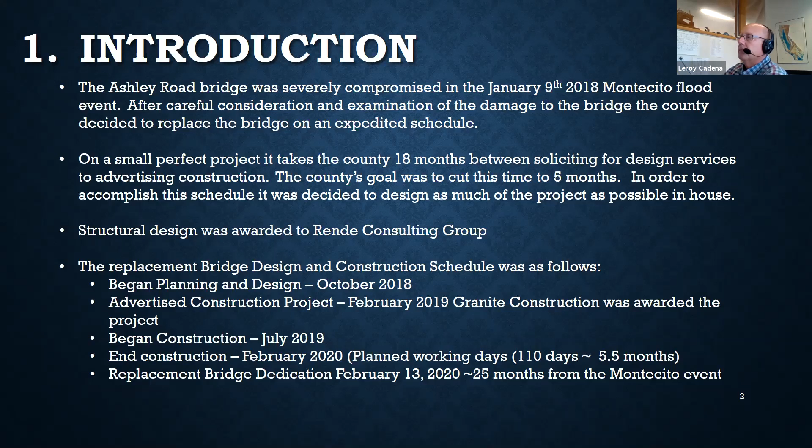The project included the following tasks: removing debris, done by our construction team; reshaping the channel, also done by construction, overseen by them; design, selection, and installation of a temporary bridge, also overseen by our construction team; and design of the replacement bridge was, of course, the design team, and construction of the replacement bridge was actually done by our construction team.

I don't know why I said design. But the dedication was handled by our administration team. I'm just trying to say this took a group effort from a lot of different divisions in public works to accomplish this task.

So a brief history about the bridge. The Montecito Bridge, or the Ashley Road Bridge as we call it, was constructed in 1918 over Ashley Road, over Montecito Creek. The bridge consists of a single span cut stone masonry arch, and it was built on cut stone masonry abutments and founded on larger cut stone masonry spread footings.

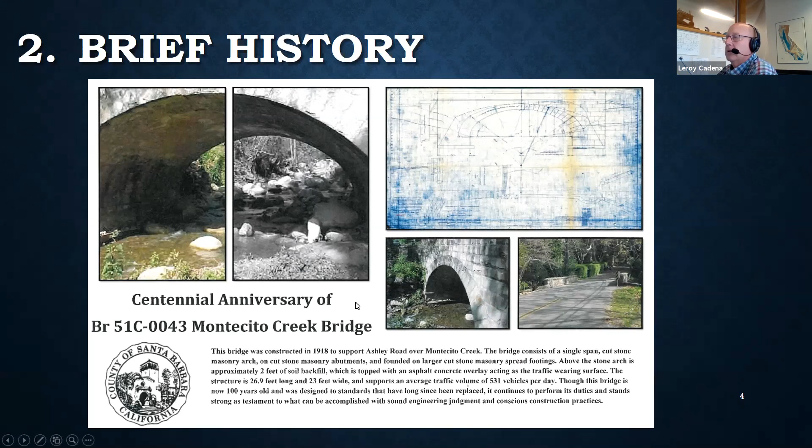Now I'm going to prepare you because we're going to show you a video. We originally took this video as part of work prior to the storm event, when we were working on scour countermeasures for this bridge. Part of this video was taken before the storm event, probably just a few weeks before, and then it transitions into post-event footage.

This footage was taken by our admin team. And there we see the dramatic effect of the storm event.

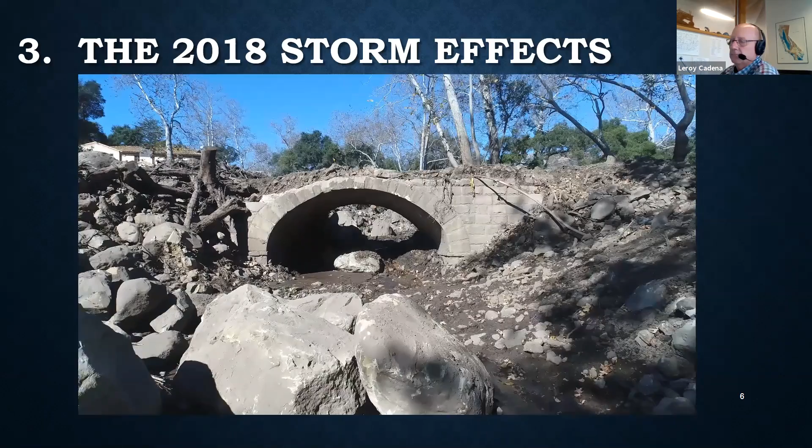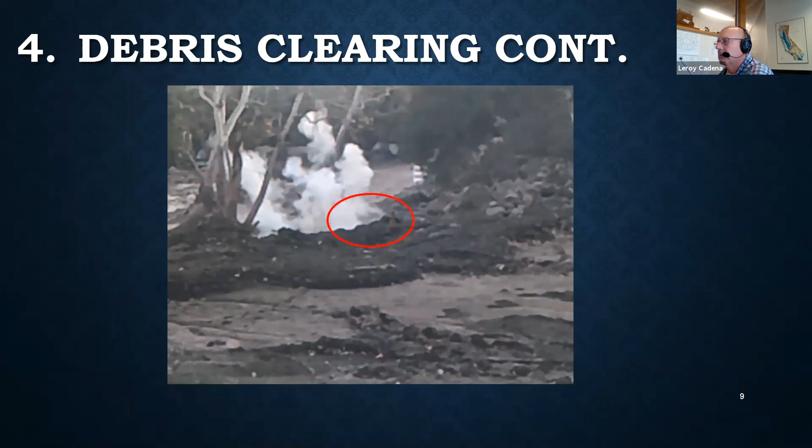Now this is a video of the actual demolition, and what was left was this. It worked very well, but it took the team coming up with several ideas to try to remove these large rocks and debris out of the way.

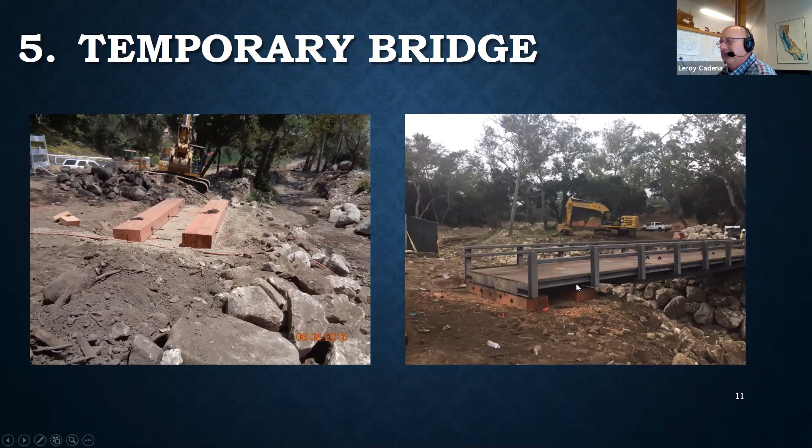Once that was accomplished, we installed a temporary bridge for emergency access and pedestrian use. That bridge was founded on a spread footing. Here we have two timbers on each side of the footing compressed together with ties, and concrete was poured in between. On the right, you can see the bridge being placed directly on the footings. Here's the cast, the forms prior to pouring the concrete, and here's the final product. So it did its job.

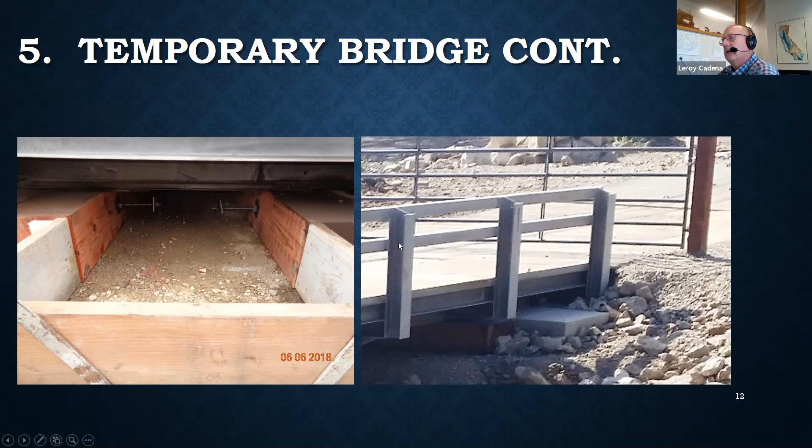It lasted for our duration. I don't think there was any emergency use, but the fire department did drive over it a couple of times just to make sure they could access it. Here's a finished picture of the temporary bridge.

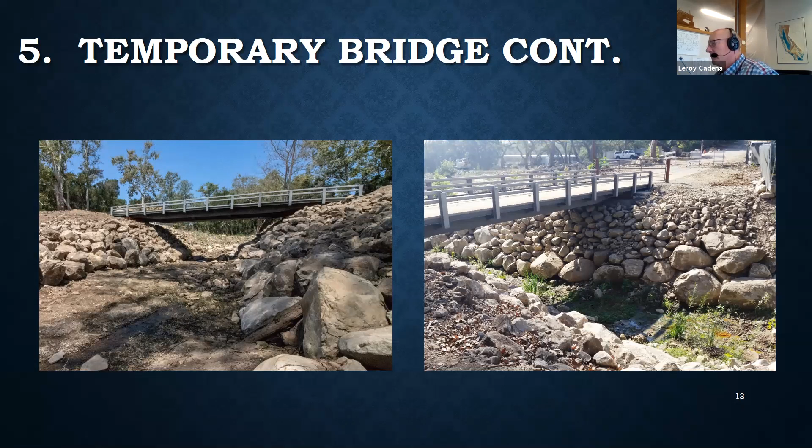Also, because it was a temporary bridge done under emergency work, we took the opportunity to shape the channel under that emergency work for what was going to be the final shape of the channel for the permanent bridge. You can see this rock is all lined, shown in both pictures here. We tried to take advantage of that so that during construction of the permanent bridge, we wouldn't have to access the creek again.

Here's a couple pictures of some temporary utilities that had to be replaced. We had a water line, and this was a temporary realignment for the construction of the temporary bridge. The water line gets reconnected here on the side of the bridge, and underneath the bridge is a sewer force main that was attached as well.

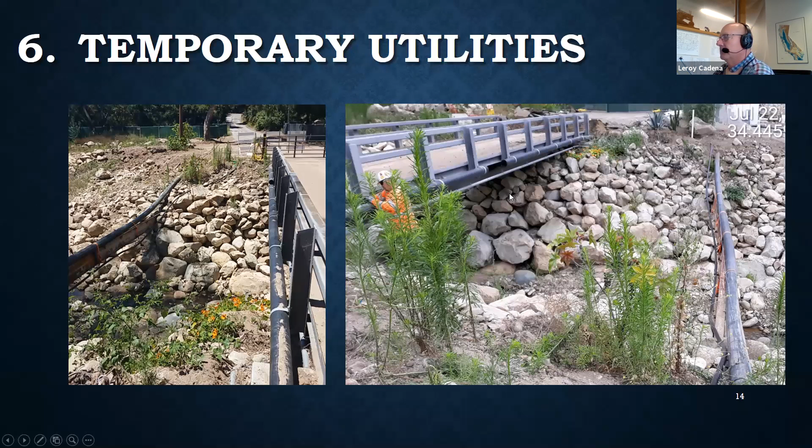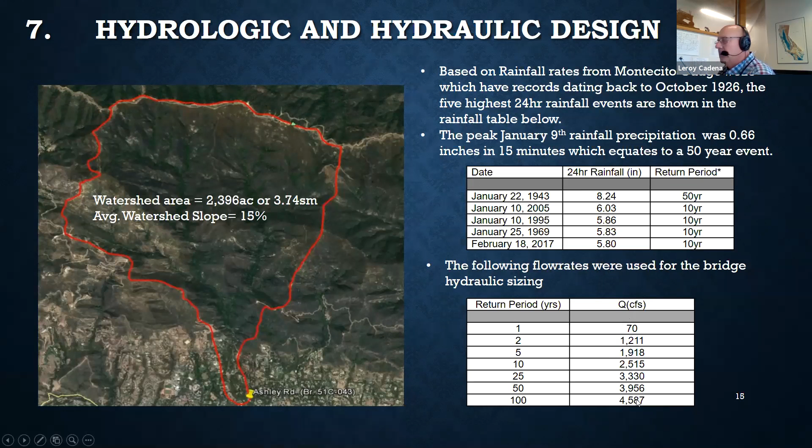The flow rates we used for the bridge design: we used a 100-year flow of about 5,000 CFS. 4,587 was our design flow, and we exceeded that slightly.

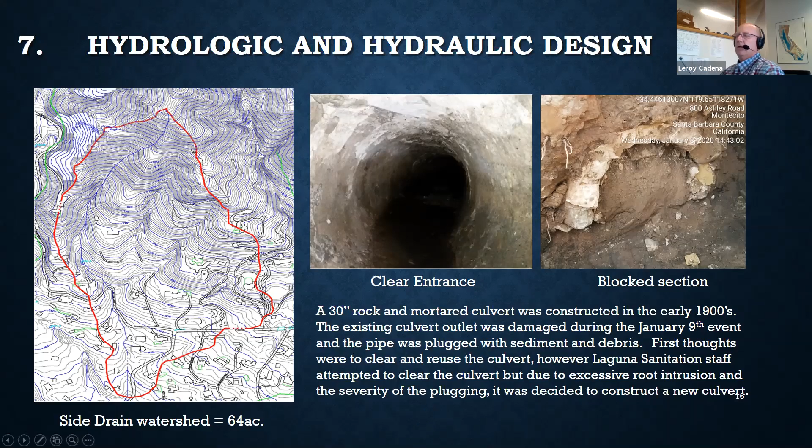We also decided to move that pipeline to the downstream side of the bridge instead of the upstream. The drainage area for that was about 64 acres. We also ran HEC-RAS for the bridge design.

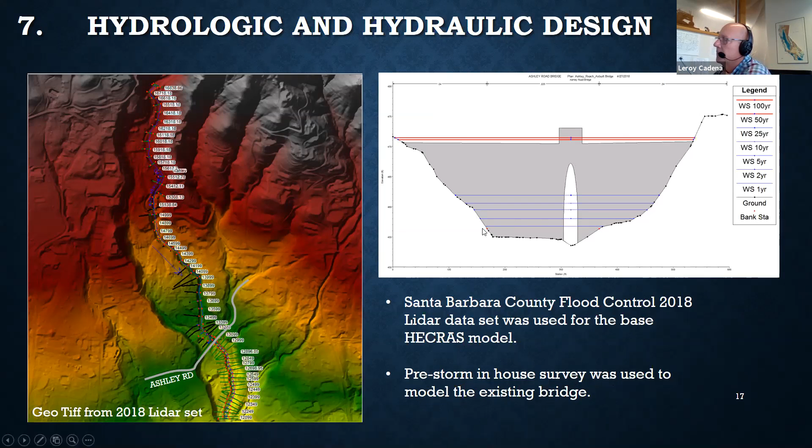Here on the left side, we have a geotiff of a 2018 lidar set that we obtained from flood control. Pre-storm in-house surveys were used to model the existing bridge. So the surveying that we were doing to model or work on the scour countermeasures, we used that information in our HEC-RAS to model the existing bridge.

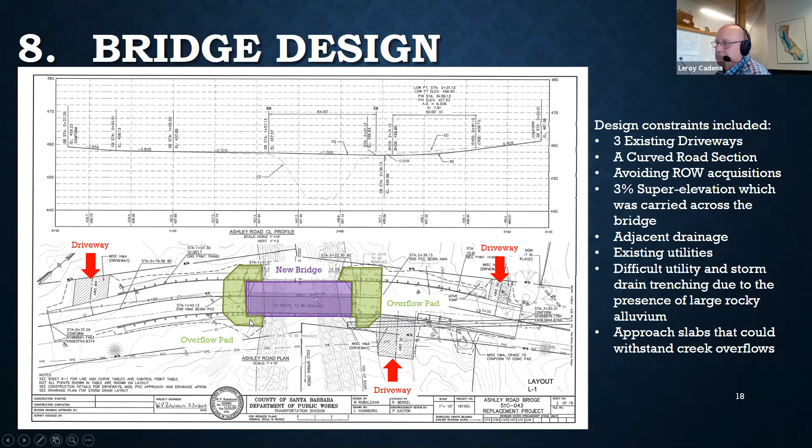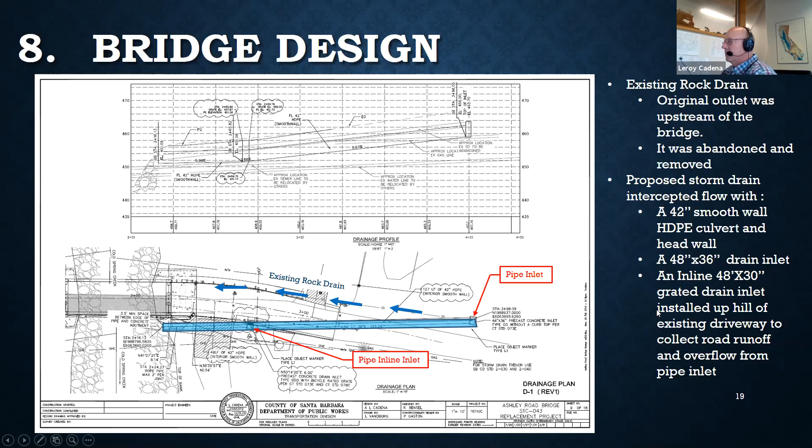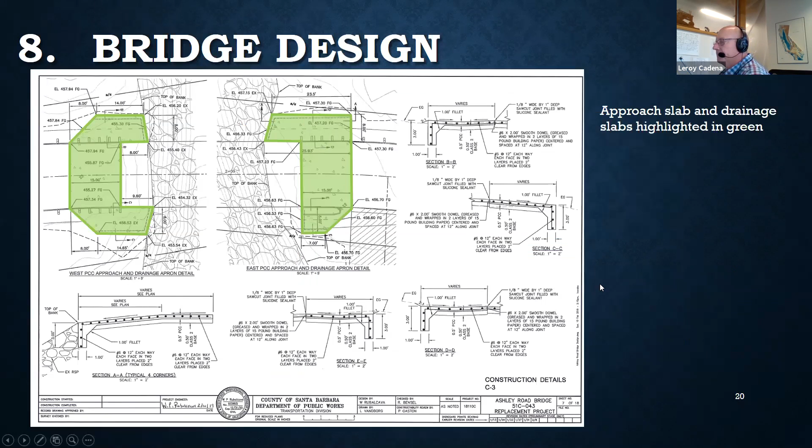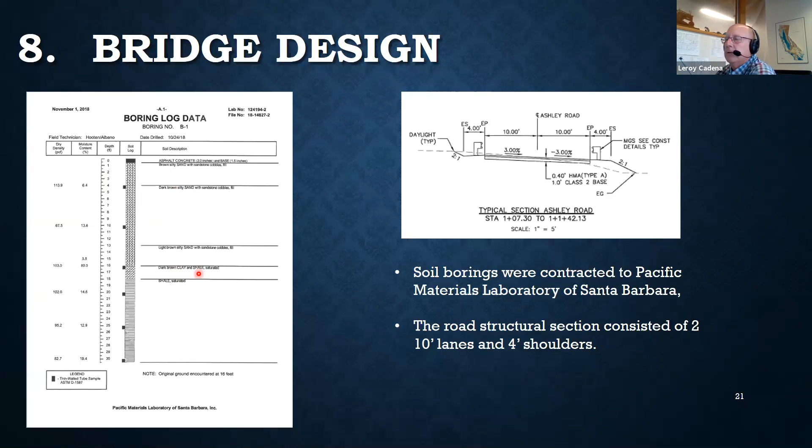Now the design: we chose box girders, so 6 box girders, precast, each one 3'6" by 2'6", and we had 4 conduits going through the bridge. But we also wanted to give the bridge an arch appearance because aesthetics is very important in Montecito. So Greg Rindy came up with the idea of doing a fascia wall in front of the box girders that had an arch bottom, so that would give us the appearance. Then we would place stone veneer on the fascia walls, so it would look like a stone arch bridge when we got done.

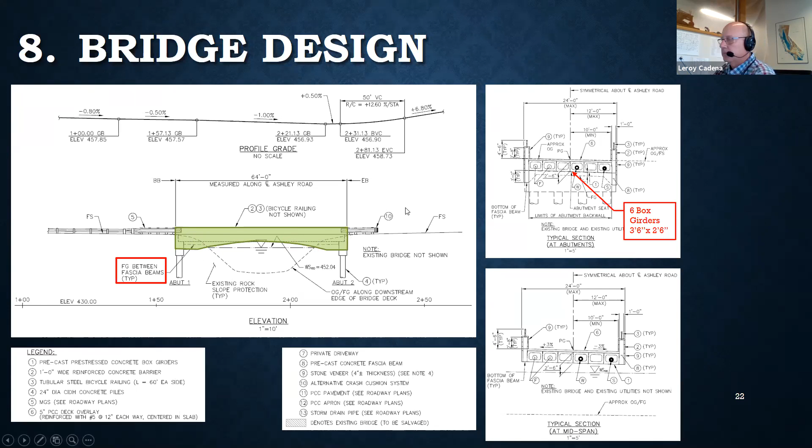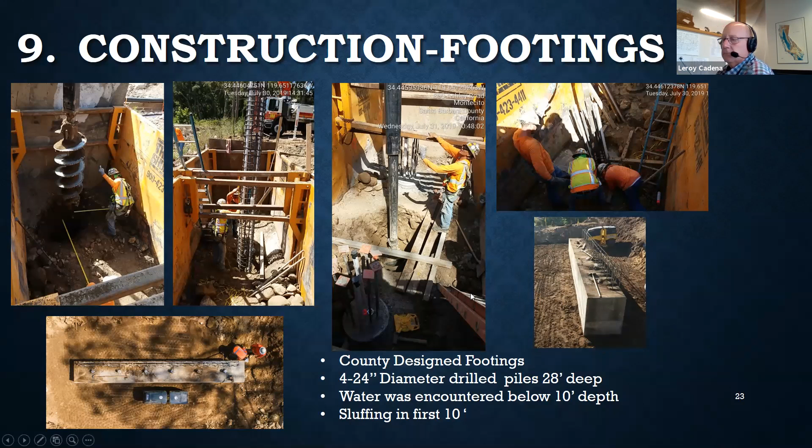Now we're going to talk about the girder placements. The girders, like I said, were the contractor's responsibility for design. We had 6 precast girders, 3'6" by 2'6", and they were 62 feet long. We had 4 conduits in each one.

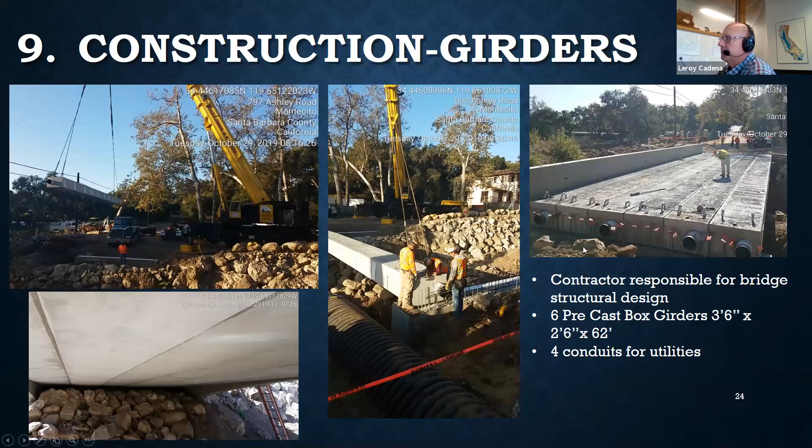You can see the fascia wall going in. The fascia beams rest on the pile caps. They're bolted to the box girders. The fascia was going to give it the appearance of an arch bridge, and we would have some stone veneer.

In this first photo, we can see the fascia wall being moved into place. In the second photo, they're just about got it lined up. You can see the lintels here - they're going to be used to support the veneer material.

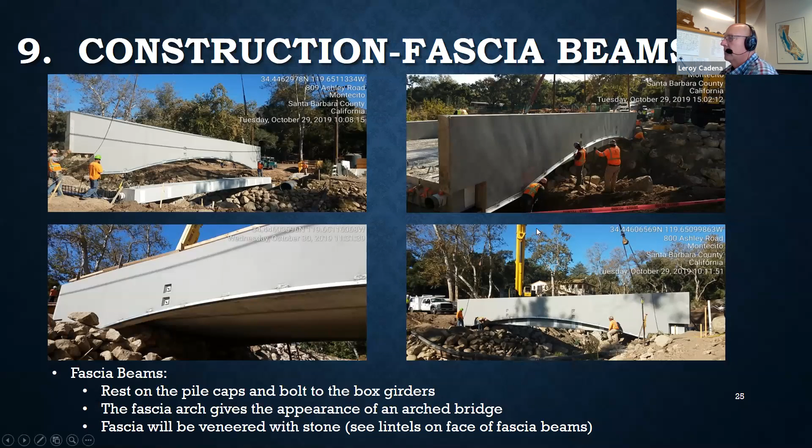The fascia stones were hand cut stones, about 4 inches thick. The weight of a full size stone was about 80 pounds. Since the goal was to stay out of the creek and prevent environmental issues, scaffolding was hung over the top off the fascia for the workers to place the veneer. The capstones you can see here were pinned together. Once everything was done, it was pressure washed to clean off any excess grout that might have gotten onto the stones.

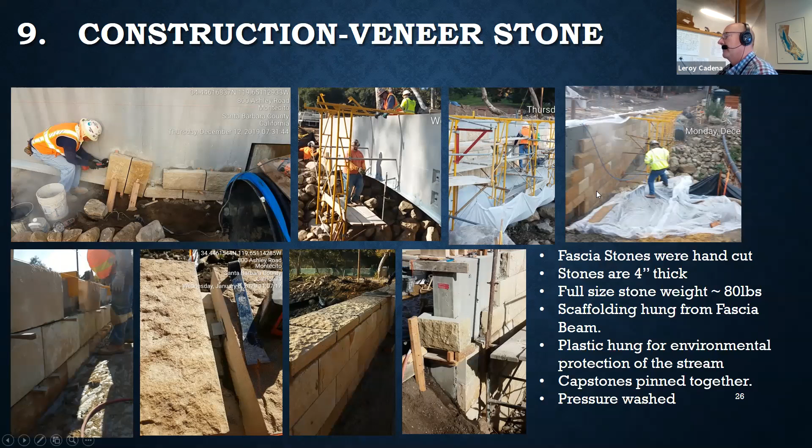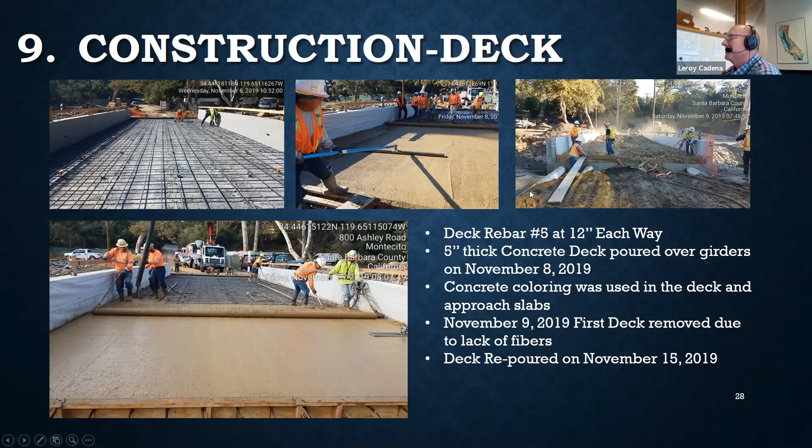The approach slab thickness was 8 inches, and we had drain aprons constructed with rebar and cut-off walls to accommodate the overtopping flows and to protect the slopes from the road drainage. You can see in this photo these styrofoam blocks that were used as knockouts for the railing that was going to get attached, so they blocked those out. You can also see them peeking through here on the slab.

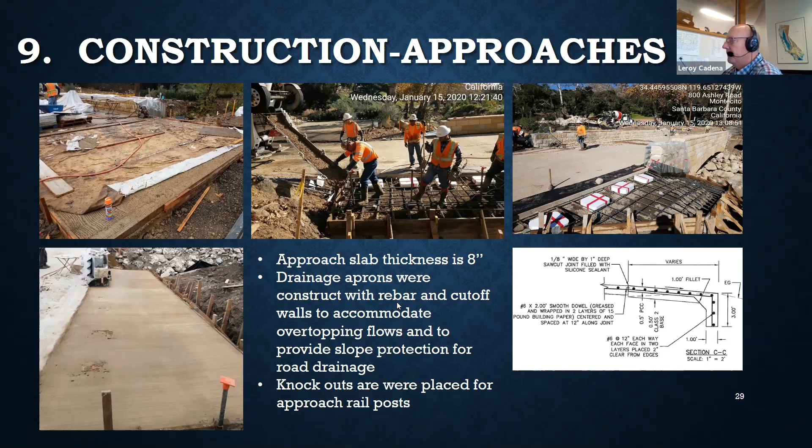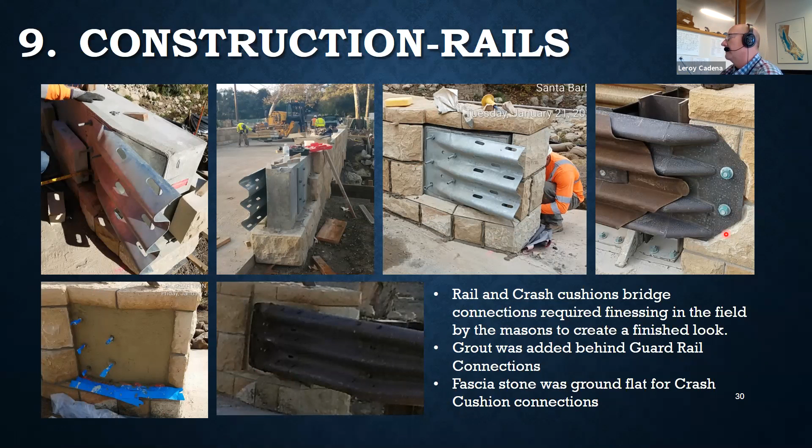So as you can see in this photo, this is the connection, and it just didn't look very good. So the masons added grout behind that, and this was the finished product here. And for the crash cushions, you can kind of see where we ground out and smoothed off the veneer stone to connect the crash cushions.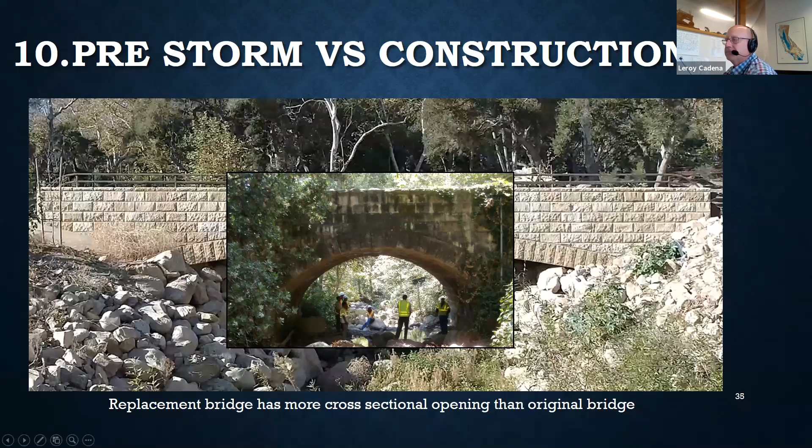Bridge cost, or the project cost. For the temporary bridge installation, our total cost was about $203,000. We saved money by refurbishing the temporary bridge from another county project, and that saved us time and money in getting that bridge installed.

The permanent bridge replacement cost us about $2.25 million, $2,250,000. The design cost, in-house design, was about $175,000. Construction cost was $1,800,000, and then our inspection cost was $278,000. So combined, the whole project cost us about $2.5 million.

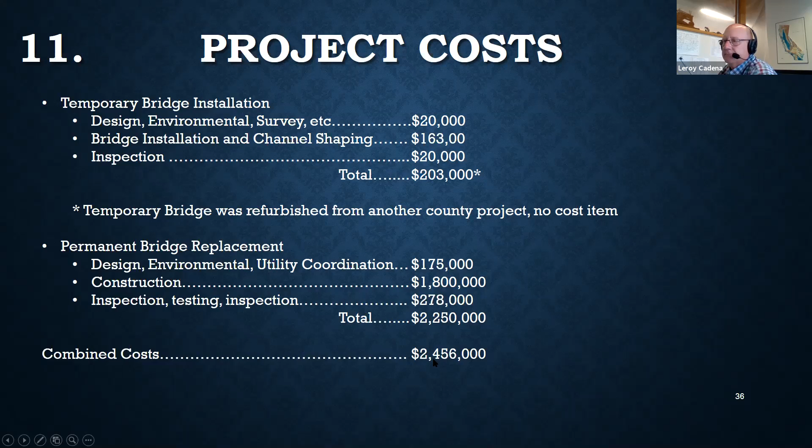And that's the end of my presentation. If you have any questions, we're open to take them.

Well, coming from the county of Santa Barbara, this is Chris Doolittle. I think you've set a very dangerous precedent that we're going to be forced to have to follow in terms of time of completion of design for a bridge. So thanks there, Leroy. My pleasure. Yeah, we always strive.

That was quick. So I do have a couple of interesting facts while we're waiting for people to think of some questions, if you'd like. So here's some fun facts.

Public Works' overall cost for cleanup and repairs due to debris flow was about $140 million, which does not include all the reimbursements to flood control or transportation departments. The majority of the cleanup cost has or will be reimbursed. So in other words, we had to put that money out of pocket.

The Ashley Bridge Replacement Project is one of 16 county bridge repair and/or replacement projects resulting from the debris flow. We estimate a total of about 500,000 cubic yards of sediment and earthwork was removed from the area, most of which was in flood control work, clearing and improving the channels and the basins. And the majority of the transportation projects resulting from the debris flows are near completion, while flood control continues their efforts to improve basin capacities in the area. So we still have some ongoing work there.

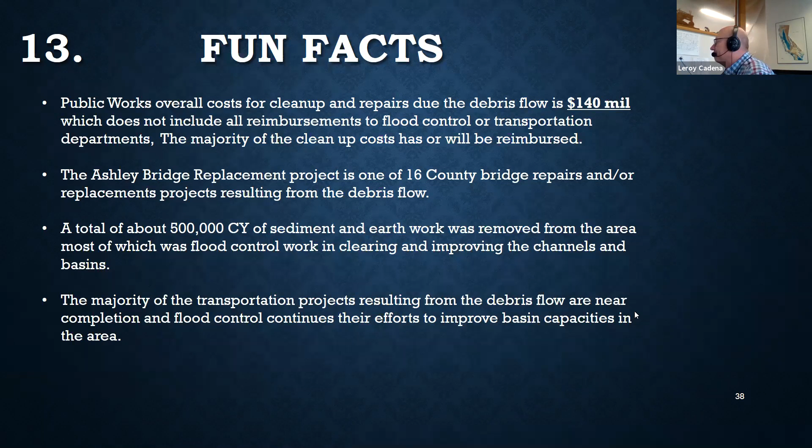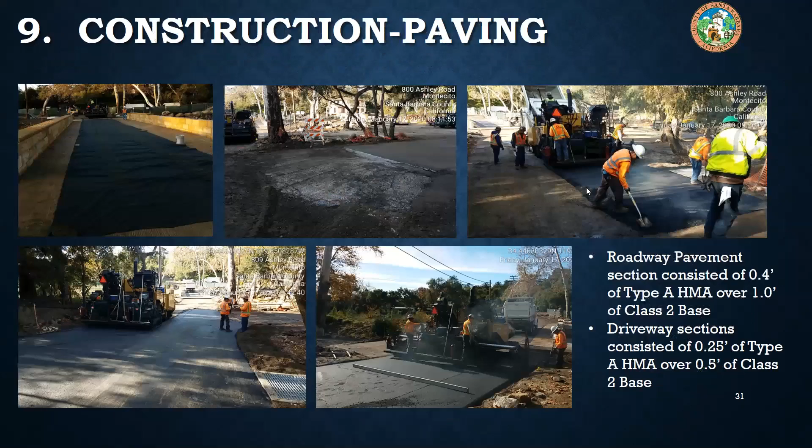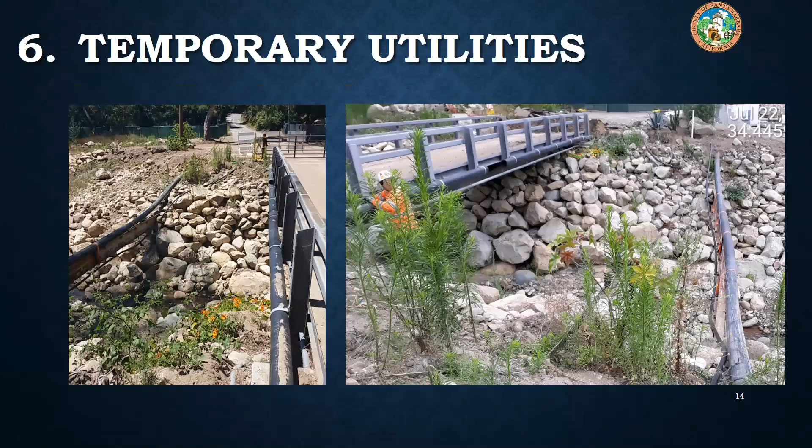I have another comment since nobody else is asking. Sure, I'll provide a comment. I think it's just remarkable that this stone arch bridge remained essentially intact with the amount of damage and destruction that we saw along this whole corridor, and the amount of scour that was there. When we went to the site to look at this bridge, the arch itself remained completely intact, and it was just the barrier rail on top of the bridge that was completely removed. But you can see the arch is still intact. And there were several large, absolutely large boulders that were still stuck in there.

And I had some help from Caltrans to blow those boulders up. A lot of them were 8 to 15-foot size boulders. And I was so concerned, Leroy, that I was going to damage this bridge because I thought we were going to put it back in service. I was really scared that I was going to do some damage. So they blew up the rocks, and lo and behold, it didn't affect the bridge at all. And I wiped my brow, and then I hear that you guys just went ahead and demoed it. So thanks, all your concern is out the window. Exactly.

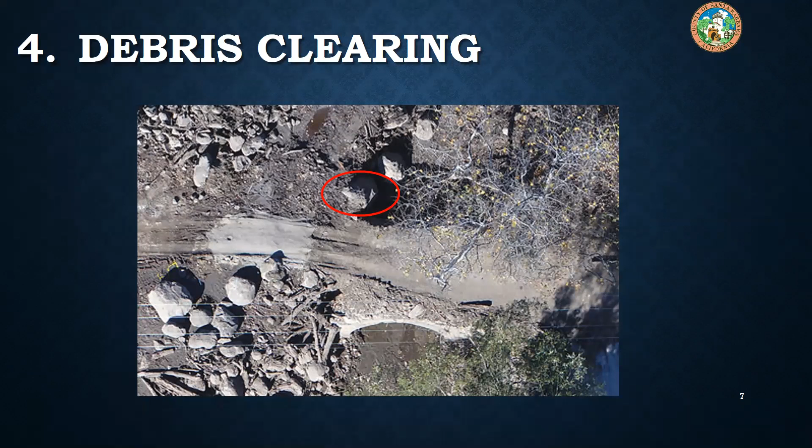Well, we looked around to find somebody who would stamp the repairs, and I don't think we could find anybody that was willing to do that. Was part of the problem.

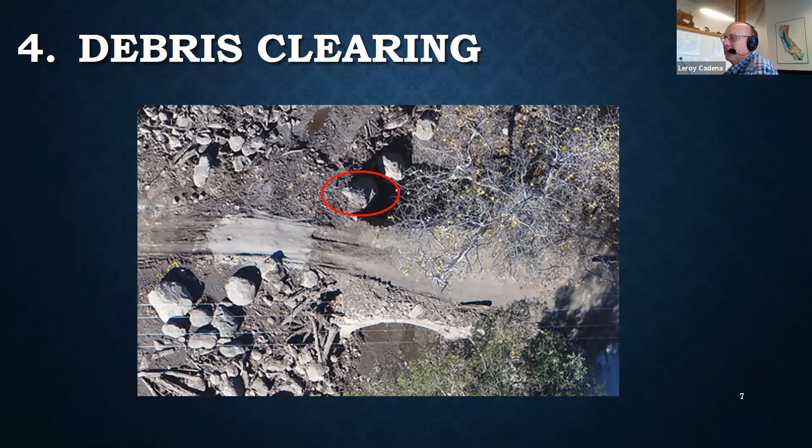But yes, it's amazing how that arch stayed in with all this debris flowing over it. I mean, we've always learned in engineering about the power of an arch design, and I think this really is a testament to that.

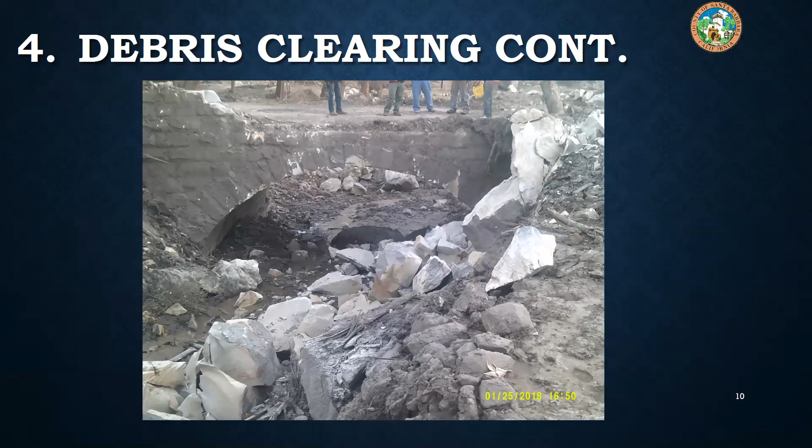Thanks, Leroy. That was a really interesting project and good presentation. So thanks a lot. Well, I want to thank everybody that worked hard on this together. I mean, it took a lot of effort for people to put this together in-house.

Yes, we had to put other projects on hold, and others kind of picked up where they needed to keep the other projects moving somewhat. But it was an interesting project, and a lot of hard work on everybody's part.

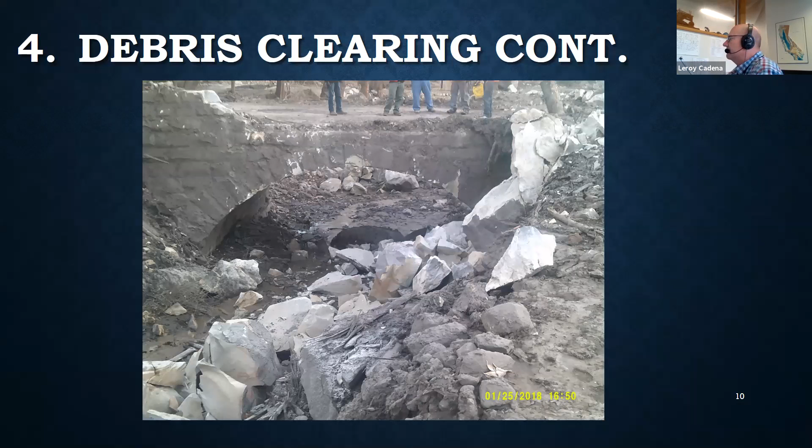You want to see that blowing up that rock again? That was my favorite part. Yeah, this was a great presentation. Thank you, Leroy. If nobody has any other questions, after we watch this demo one more time...

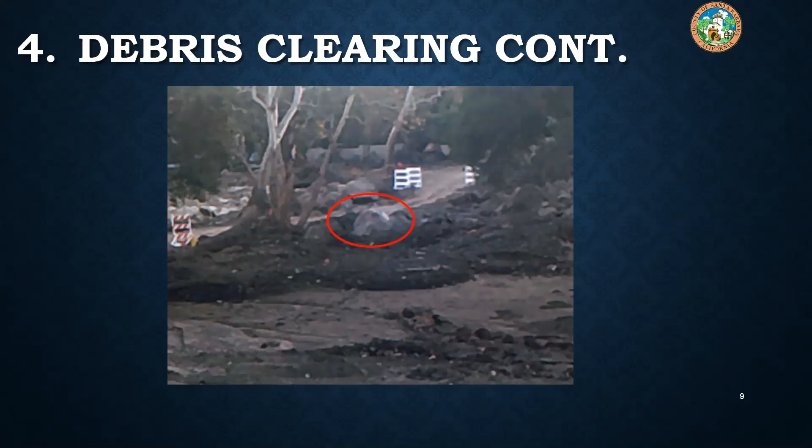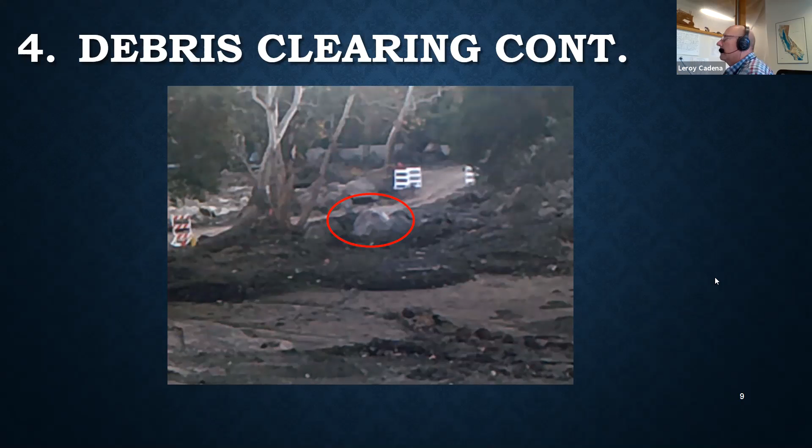Leroy, this is Sean from M&S. Do you have other bridge projects coming up in the Montecito area, like Cold Springs or any others?

Not of this magnitude. There's just minor things we've done. Most of the projects have already been out for construction, the plans have already been constructed. We're out for advertisement for construction.

Hey Leroy, this is Walter. So, Sean, we do have the Cold Springs Bridge replacement on East Mountain Drive. That's going to probably go out either next year or the following. And then we're currently in construction on the San Ysidro crossing, which is more of a private driveway within a public easement. Okay, good. Thank you.